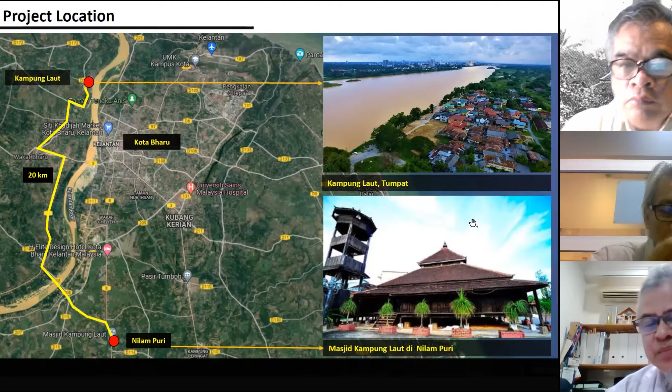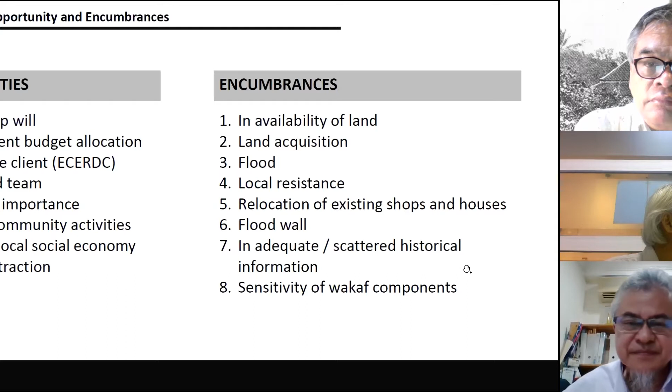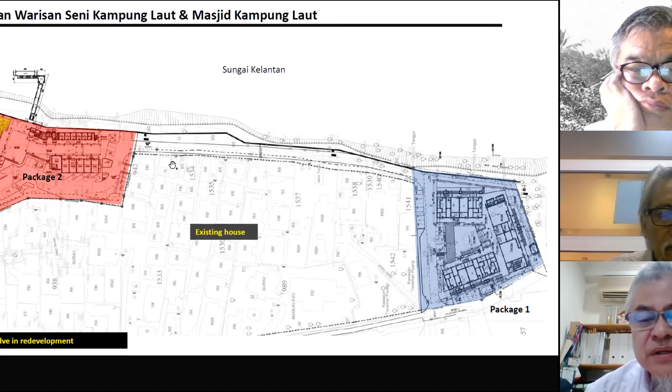Another site plan, much clearer, of package 2. On top is the platform that will house the Masjid Kampung Laut, and on the right side is the jetty. Interestingly, the flood wall has blocked the view of this package 2 site, but we requested and completed a flood gate, so people can access the jetty from the platform at street level, without having to climb over the wall.

We are also preserving two mature rainforest trees, which will blend nicely with the relocated Masjid Kampung Laut. Supporting the masjid is some commercial activity, a workshop, and a small shop selling delicacies. On the right side, we have listed some of the units that will be built together along with the Masjid Kampung Laut.

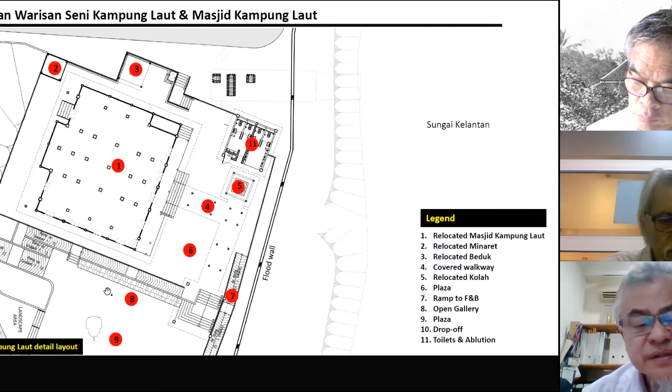We are bringing the original design we saw in Nilam Puri and putting it in place on this platform, just as it was in Nilam Puri. In terms of height from street level, it's actually 3.5 meters. So it looks like the original, but gives a good, prominent level from the street. I'll show you the perspective later. From this platform, visitors can get a good view of the river, as well as the other side of Bandar Kota Bharu.

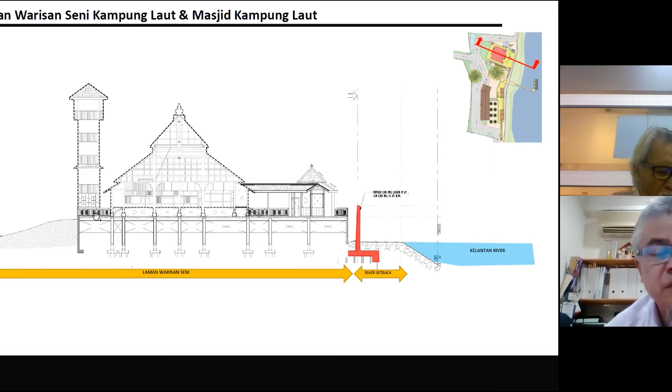See, this is a view from the river. This is actually the east view from the jetty looking towards Masjid Kampung Laut.

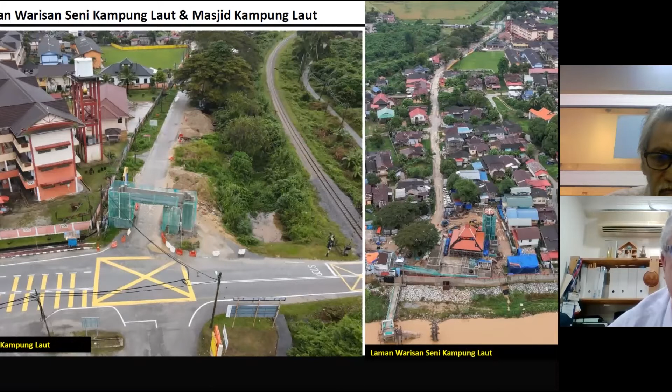On top of that, we also have a design gateway to welcome visitors to the overall Masjid Kampung Laut village and towards the mosque. On the right side is actually the view of the site mosque.

Looking at this, this is actually the main access. So from this main access, you can have a good glimpse towards the mosque at a prominent height.

Another view of package 2. On the left side is actually the mosque under construction, and on top of it is the jetty. Currently it's on a high side, high water table. The river is rising, but all levels are actually safe from flood.

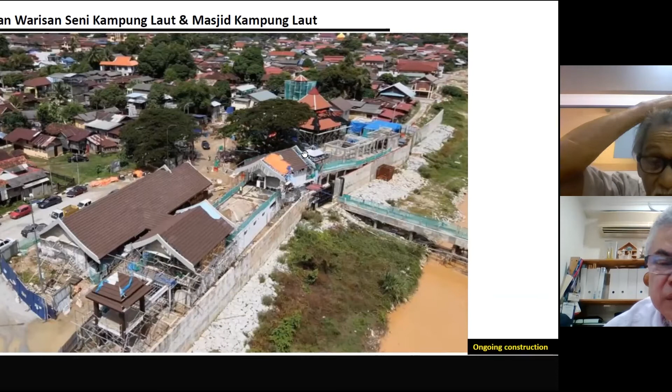Another view from the south of the site. I just want to show there's a floodgate so that people can access the complex and mosque at street level. They don't have to climb over the flood wall.

Another view from the east, looking from the jetty towards the mosque. Another view from the south of the site. I'd like to highlight that we are preserving two rainforest trees, which will blend nicely with the mosque.

View from the north. Okay, that's about it. So the overall complex is under construction and will be completed, inshallah, by mid-March next year.

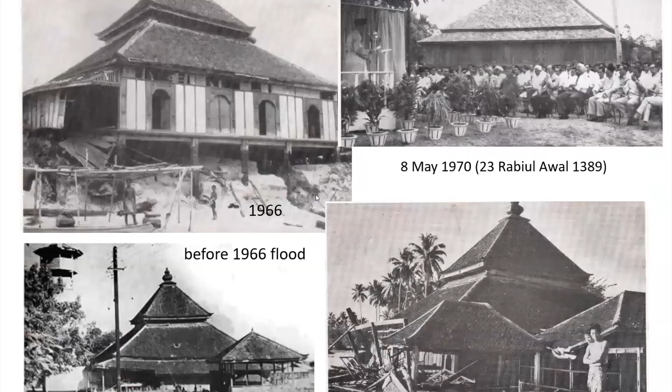A very quick step back into the history. The mosque in its original site was almost destroyed in 1966 and pulled into the river because of the flood. The picture speaks for itself - top right is the ceremony of handing over the mosque when it was relocated to the Nilampuri side. On the lower left, on the original site, you can see a lot of burial grounds and cemetery around the mosque, and on the right is the remnants of the mosque after the big flood of 1966.

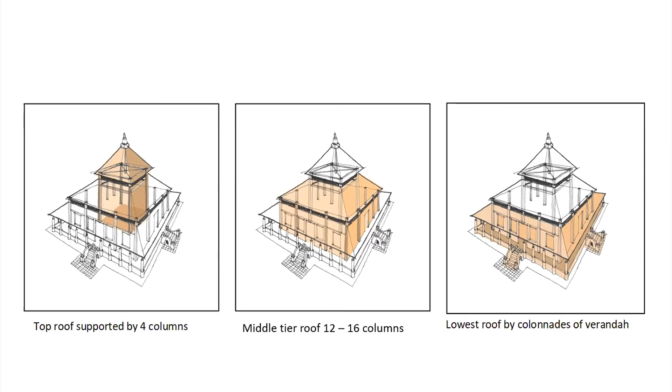Initially only the main prayer hall was relocated to the Nilampuri side, and then in 1988 efforts were made to add a few more spaces around it. For the relocation process, we only took the main prayer hall because of the limited space in Kampung Laut, leaving behind these other spaces. But we have kept them good, and in case the management decides to use them for some other function before a new mosque is perhaps built on the Nilampuri side.

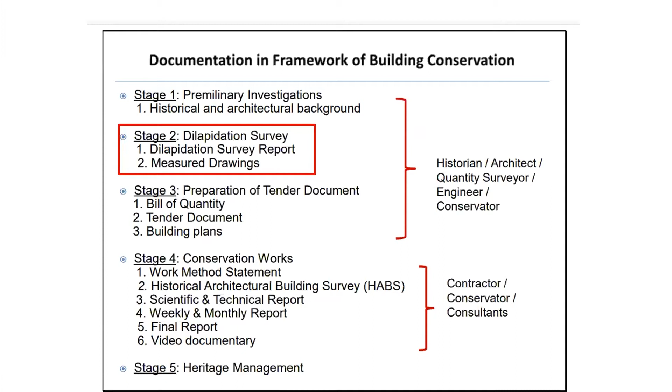This is also mentioned in the Jabatan Warisan guideline on heritage building conservation. It states clearly the process of documentation. I'm referring mainly to number 2, colored red or pink, which is about the dilapidation survey report—a detailed study and survey of the building to understand the defects, the decaying process, and the general condition. This is properly documented with photographs and drawings, and becomes part of the contract document and the BQ process. This report must also be submitted to Jabatan Warisan Negara.

What is a dilapidation survey report? It's straightforward—a survey to identify building defects and general condition, using video and digital documentation. It must be detailed and complete so it can give direction on how conservation or restoration work can be done, and serve as reference for future maintenance programs, students, and researchers. This report contains information on the condition and status of the building, and is usually done by a conservator, who identifies the source of defects and provides indications on how repair work and treatment should be carried out.

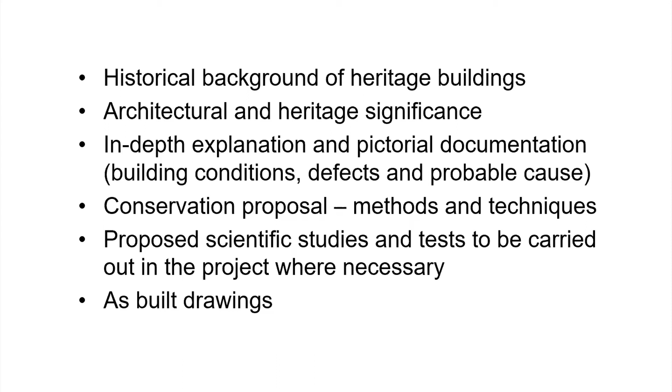We also have to do the measured drawing, because from this drawing it will indicate the location of the defects and so on. That will lead to a better BQ.

This is the dilapidation survey report of the Masjid. We did this quite a long time ago, about 2 or 3 years ago, before we were finally able to submit to the Jabatan, and now it's in the process of relocation by the contractor.

Just a little bit on the introduction to the building. These are all basically the components and building structures of the main prayer hall.

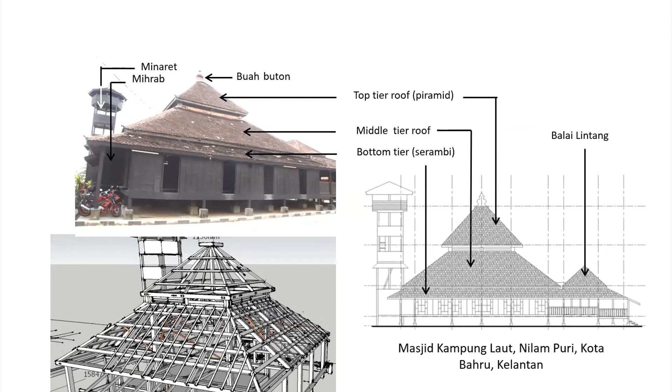Okay, sorry to interrupt, Prof. So you have 5 minutes, huh? Okay, okay, we rush.

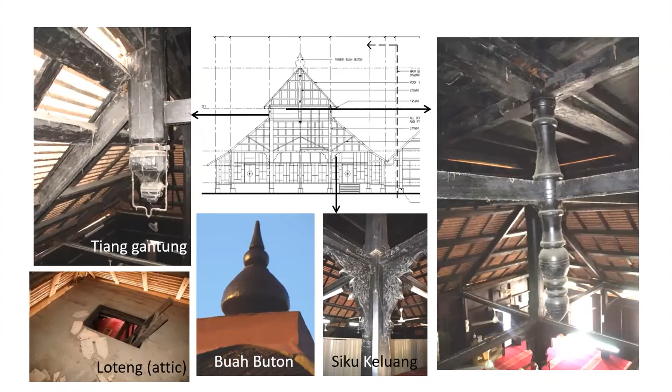These are more on the interior and the detail of the siku keluang.

And the view of inside the attic, this is what people call the suluk space. Suluk space is a spiritual space where you'll be on your own, doing your wirid and so on. Most of the ulama in the old days, this is the place they go.

Tiang gantung, quite a detail of it.

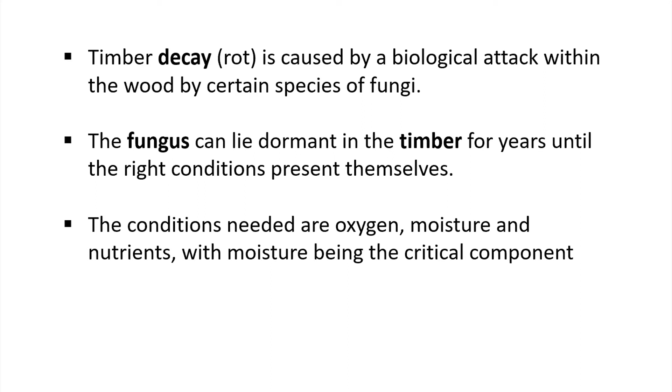And these are all again about the way deterioration happens in timber. Water is the number one enemy of timber actually, so from that water, other components will start to come in, microorganisms, fungus, all will come in.

Some of the rot is not visible from the outside, so we have to do quite a thorough study, not only visual inspection, but also other protocols.

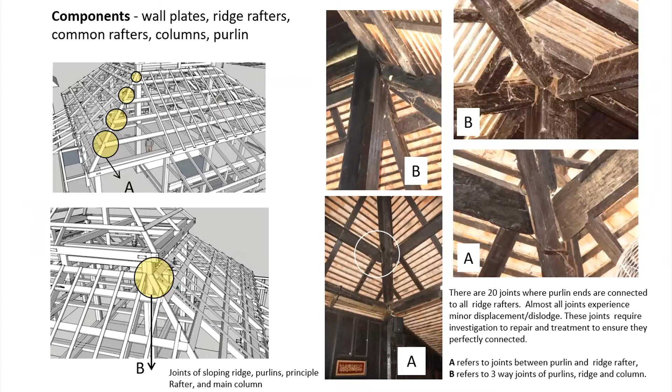This is very much the common defect, very much on the end rot, dislodging, dislocation of some of the joints and so on. These are all quite familiar in this mosque.

And also the roof tiles, slipping of Singora tiles and so on, because of the flashing has been damaged.

Again, the internal rot on the surface of the timber, because at one time there was a roof leaking problem, and that could be an indication of why such rot may be quite serious on the apex of the pyramid roof.

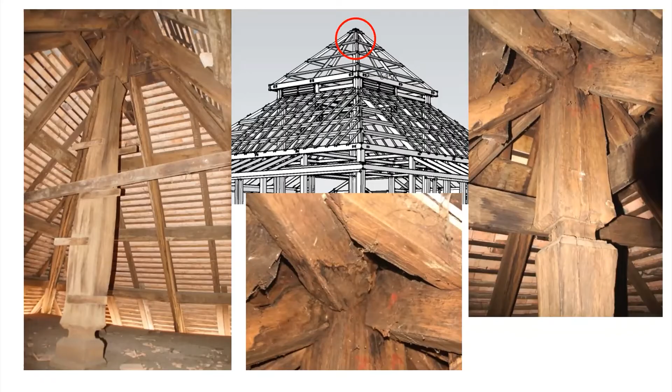Another rot will be on the base of the column. Most of the columns experience this quite serious core rot.

So in this lab report, you may note the grid number, and then you can mark it as a red circle there, and place some photographs so that you know the actual condition of each column.

This is a good drawing. Sometimes you may need additional 3D drawings to make clear the layout of the columns and so on.

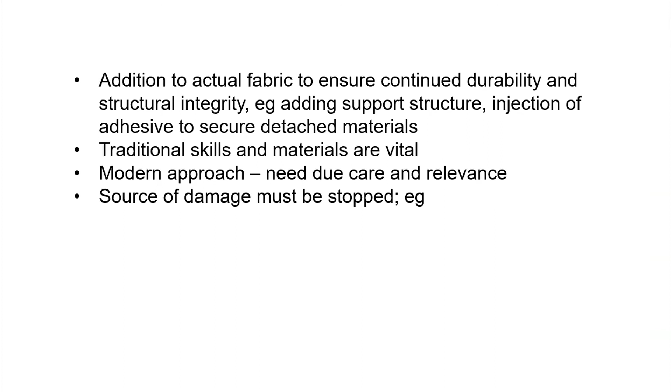Consolidation is an addition to a structure without much disturbance to the original structure. Some of the spans are too long. I found that some of the timber components have very long spans, and we are mostly going to use slightly heavier Singora tiles, factory guaranteed, so much heavier.

So one of the ways to provide additional strength is by having this consolidation work that you may propose in this lab report.

This one is about inspection to the wood. That means we are not only relying on the visual survey, but we have to use other modern techniques that allow you to understand the internal rot, and then you can detect early processes of rot.

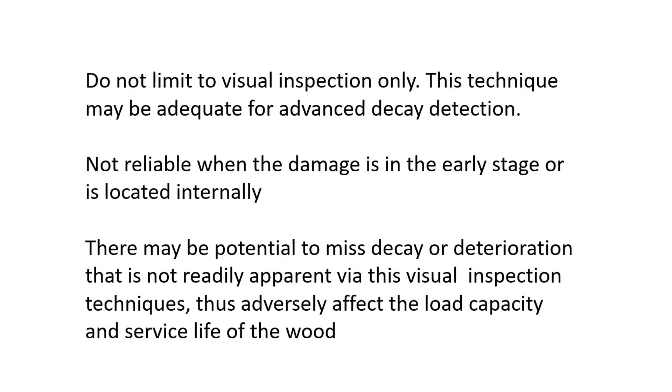About inspection again, if in those inspections you see something unusual, then further detailed investigation has got to be done.

Preservative - you have to use preservative, you have to use fungicide in order to treat the wood and sustain the strength, and also stop future attack by microorganisms or termites or any other wood boring insects.

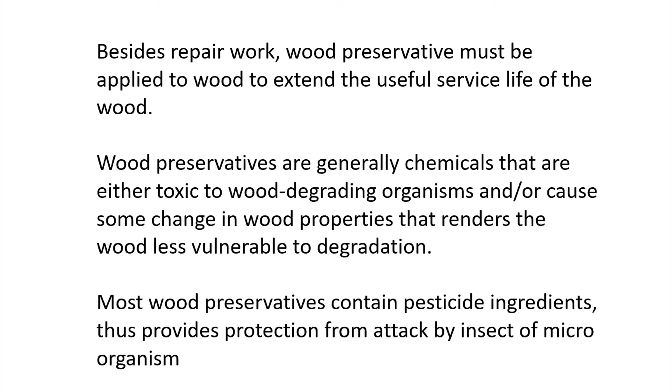Treatment of the wood - there are so many treatments on the wood that you can do after the removal.

Other items to be relocated, just for our information, the bedok, the mimbar, and also the kolah will be brought back. This is the way forward.

We are in the process. Hopefully, once we register this building as a national heritage, then we move forward to nominate to UNESCO and so on. It's a long way, but hopefully this is what we're going to achieve in the future, inshallah.

Final words - just a tribute to those para ulama who built these stones. They've done so much work that we're able to see this mosque and pass it to us. And we are here to pass it to our next generation. I like the phrase that says what we have here today is what we borrow from our children.

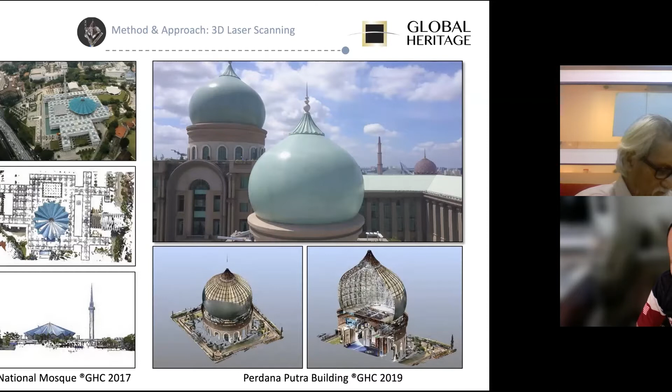This is some of the projects that have been done, in which we managed to convince Black Fox Engineering, showing that we've done the National Mosque, and also the Perdana Putra building, known as the PMO building. We've done a lot of heritage building scanning before that, including the Sarawak Dome buildings. In 2019, we did the Kuching Islamic Museum, the Kuching Textile Museum, and also the Old Museum in Kuching.

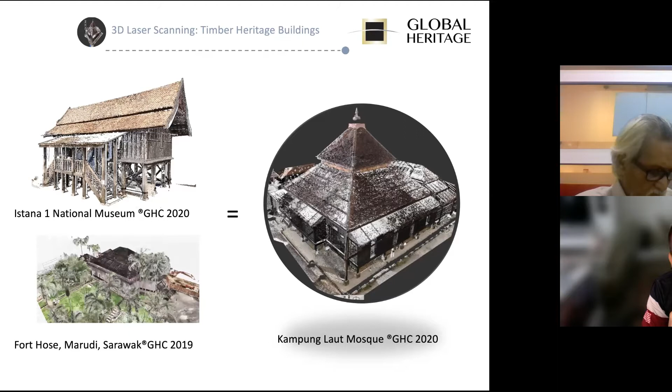A similar project where we applied this method is Istana 1 National Museum, which was our project in 2020. We also completed Fort Hose Marudi Sarawak, which is quite similar to the project we have at Kampung Laut. The difference is that the building was not dismantled, just refurbished, to repair its main structure.

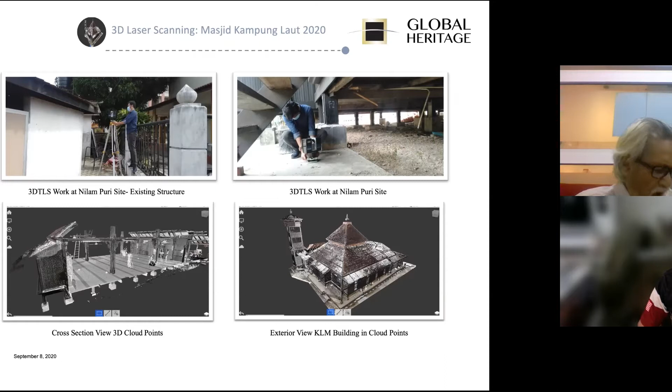Beginning with the scanning project, after we got consent from the main contractor, I mobilized our team to go to the site and scan it. I'm going to go fast here, just showing the beginning of the work and then the result. This is the result of the scanning method, from which we are able to simulate the whole process.

This is when we received the contract, which specified dismantling the building top to bottom - meaning from the roof, then the body, the mid central zone, and of course up to the stump.

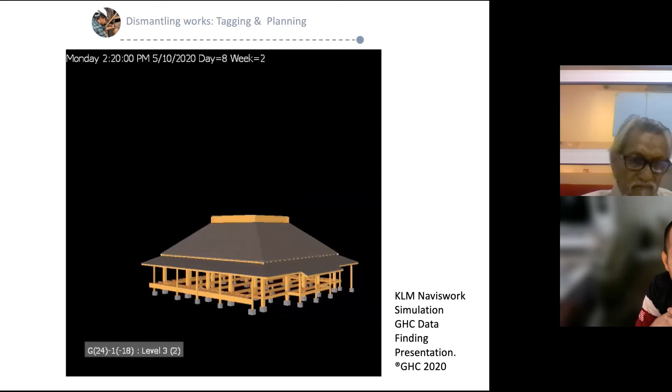But when we did our simulation in terms of the work program, it seemed like the top to bottom approach was not very suitable for the system, especially when dismantling - we needed to know where to put things and how to store them, and have a very systematic way of dismantling the whole project.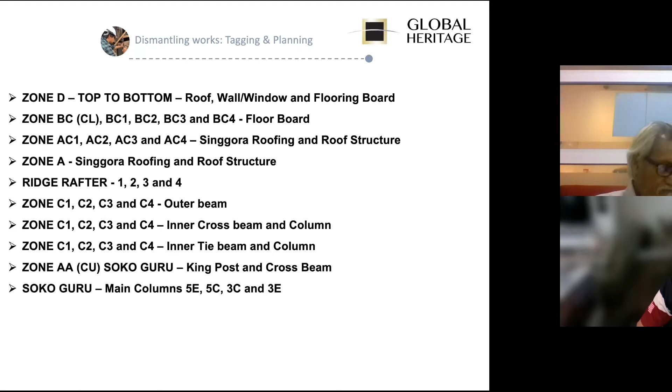Basically, what we do is zone the building, opening up the outer perimeter first. Then we open up the floor joist so we can release some of the tension of the structure. Later, in step 3, we introduce bracing to the building while doing the dismantling work.

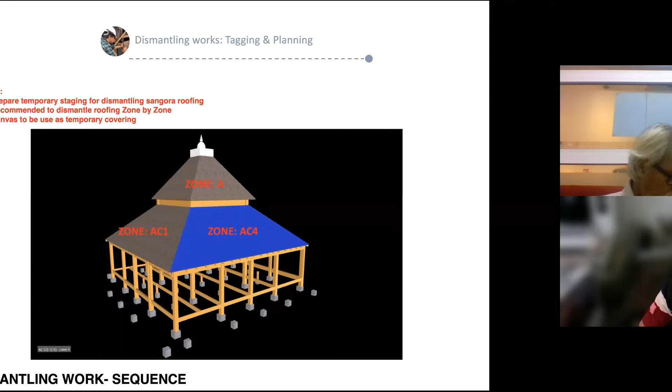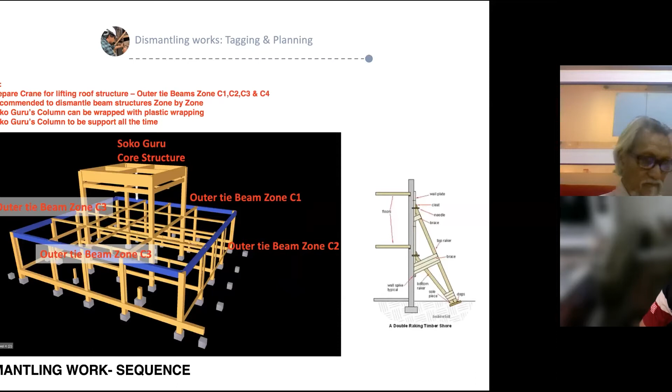This is just an example of the zoning given to the project team, so everybody is speaking the same language - it's easy to talk about zone A, zone B, zone C, zone D, so people involved in the dismantling understand our requirements and how we're going to do this. Later we zone it and dismantle it part by part until we're left with the main structure of the Soko Guru and the main structure of the building. This is later going to be the first thing we actually install, because the system is an interlocked system.

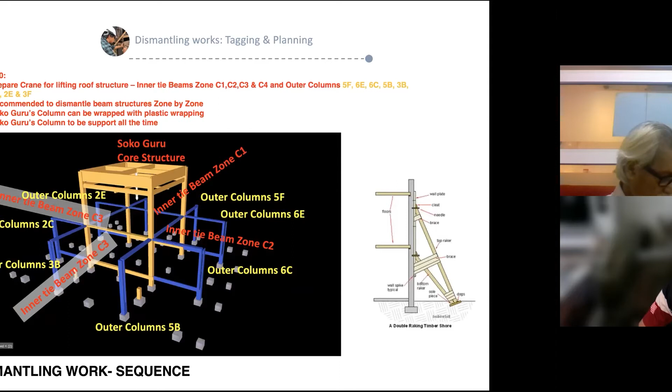So we need to be very careful not to force any of the dismantling work, but we also need to understand how this interlocking structure is actually built, so later on we can dismantle it according to the sequence. This is just showing some of the method, and then later on we're left with the Soko Guru itself.

This Soko Guru is actually very critical, where we need to remeasure everything before we dismantle it. We also need to finish the tagging in order to guide us when we want to install it back, so it's in the right sequence. This is just a diagram showing how the tagging system works.

So we have Zone D. Zone D is actually the additional part that was added in the building - it's actually quite new. And then we have the main zone, the central, and then the roof.

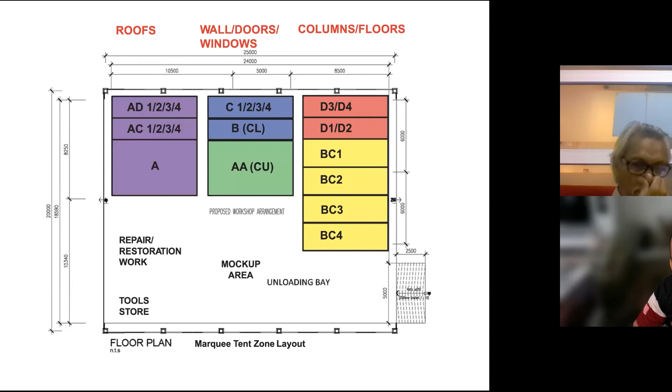So these components are laid out in a marquee tent for storage purposes before we move the whole component to Kampung Laut. The color coding you see here: the purple one is for the roof, and AA is for the Soko Guru. The blue one is for the central component, including the floor, and the yellow is the floor joist. Zone D is actually the last component of the building to be installed on site later on.

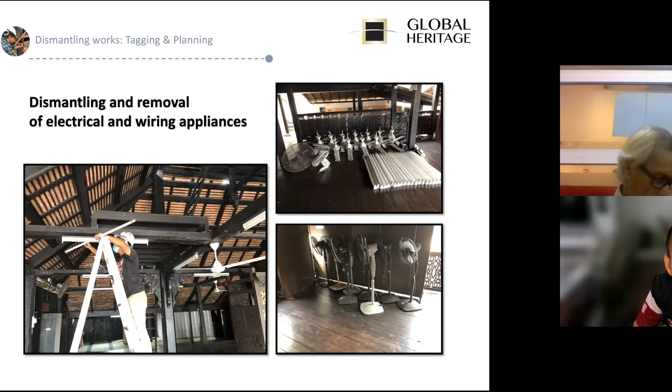So then we start with the dismantling process. I'm going to go very fast on this - I think the pictures explain it all. The most important part is actually to start tagging all the components.

So this is where the tagging component started. We have to refer to the tender drawings because the tender drawing is not specific to the component, so we need to make a note on the tender document saying that all these components are going to be recorded, and then the coding system is going to be used in our installation work later on. This is an example of the tagging that we did.

These are all the non-structural elements for the building, so these are the things we dismantle first. Later on, we recorded what things have already been dismantled. This is a sample of our weekly reporting on what things have already been achieved on site, and what things we want to achieve.

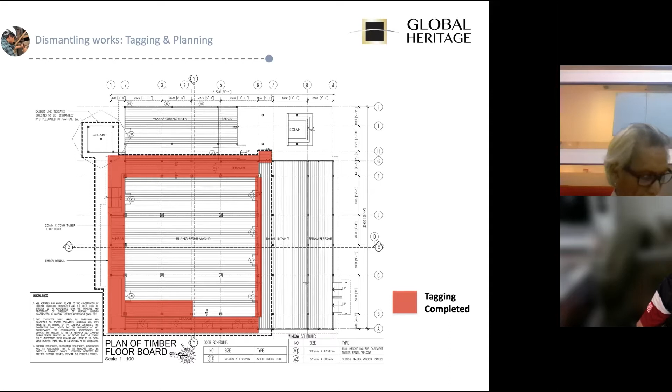Later on, we need to do a mock-up before the actual dismantling is done. In this case, the first mock-up is at Zone D - this is actually the least risk component that can be used as a mock-up for the system we are introducing. So after finishing the mock-up work, we need to start to actually dismantle the whole thing.

So just to show what I meant by Zone D being quite new - you can see the difference between the old timber and the new timber that was later added. Much of the new timber is all straight-edged and very nicely cut.

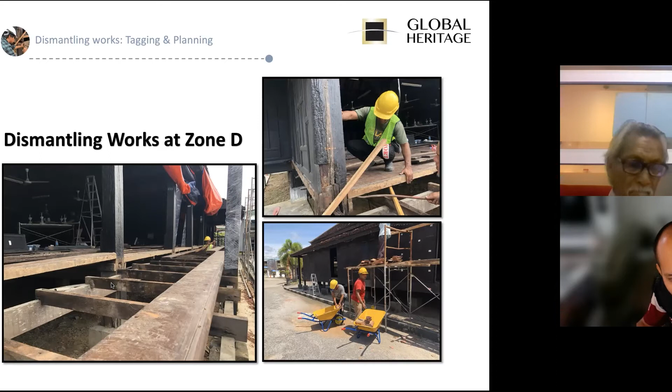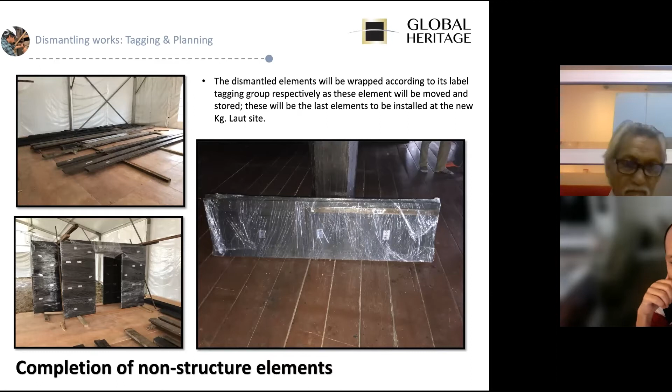So again, we have to report on the work by looking at what has been dismantled. This is just showing the complete work done for the non-structural elements, and we have to store it in the marquee tent. This is the last component we're going to reinstate when we reconstruct the building.

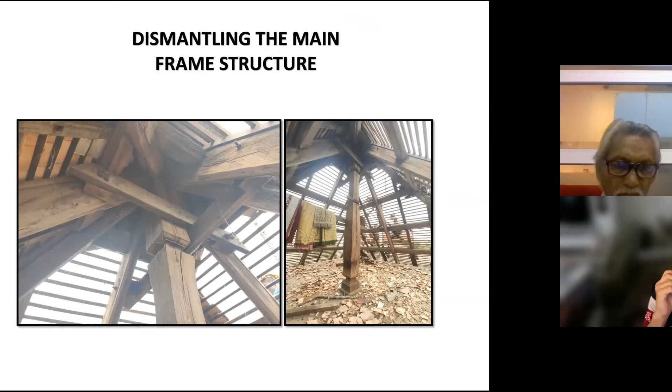This is very critical because all the processes—tagging, storing, stacking, moving, sorting, and documenting all the parts and pieces of the building—have to be synchronized so that everybody understands their role at this stage.

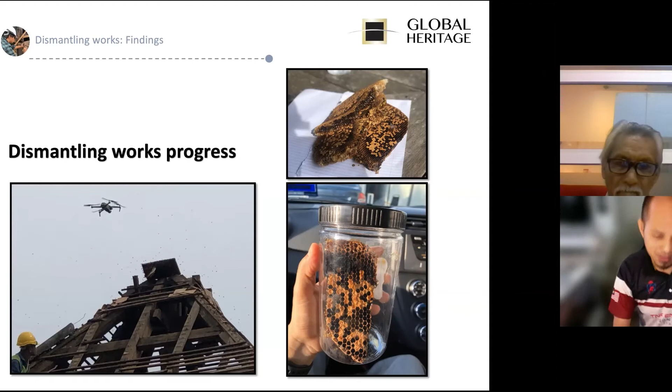So this is some souvenir that we brought back. There were bee colonies there. Okay, I already have 15 minutes, so I'm going to be very fast on this one. Basically these are the souvenirs.

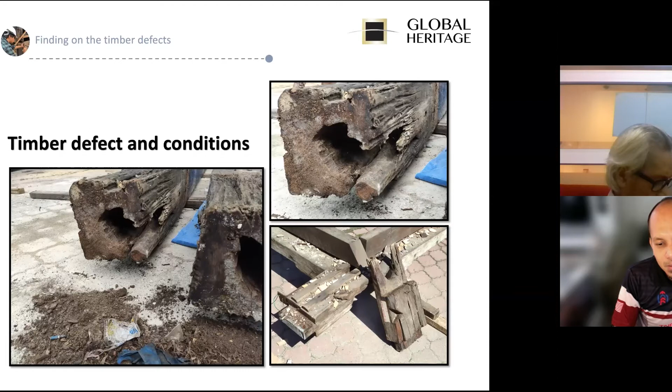Then we continue the tagging work on the ground after all the building components have been dismantled. I'm going to go fast—these are some examples of the defect timbers once dismantled.

So we have all the documentation. Every inch of the work has been documented on paper so we can submit it for assessment from the consultant, and also from the client.

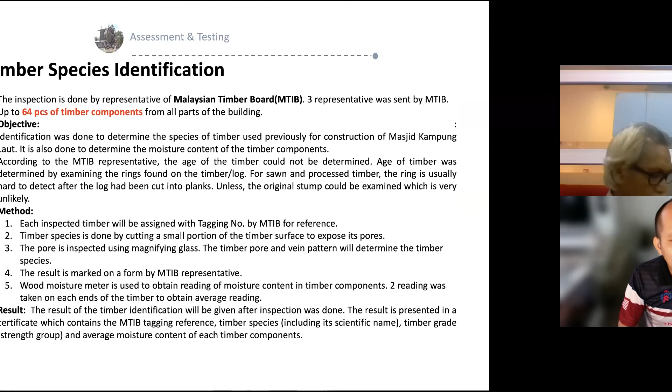We have a lab timber tester from the Malaysian Timber Board. So 64 pieces of timber components, all of the building components, we tested.

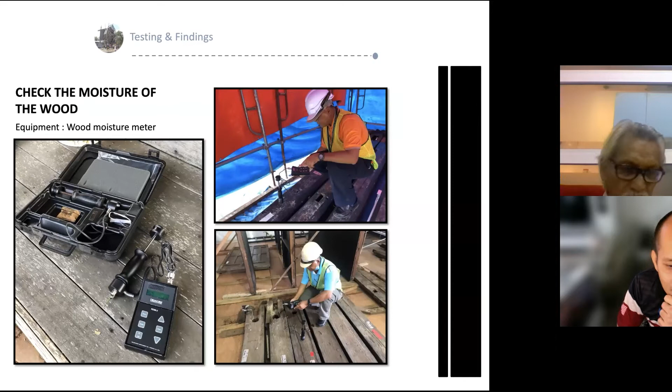This is actually a damp test to identify the water content inside the timber. This is very important.

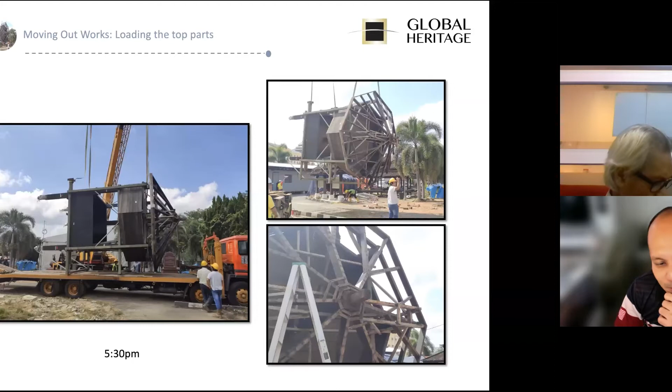Then this is the loading part. We start at basically 3 p.m. to secure the whole thing, and at 5:30 p.m. we load the minaret. Then this is the process of moving it, and all the challenges and obstacles we had to go through.

The first minaret bottom actually arrived on site at 5:30 a.m., and the top one at 7:30 a.m.—basically 2 hours later they arrived on site. So this is the first installation begin.

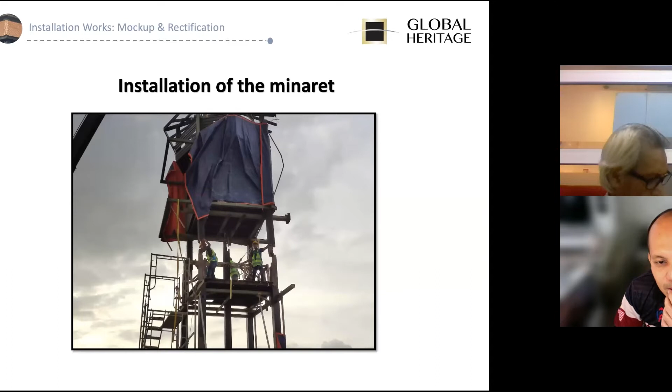This is some of the HABS drawings I completed. Then we start with the mock-up of the whole thing, because at the end of the day, with all the tender drawings, the 3D laser scanning, and all that information, it's just for us to realize that we need to do a proper mock-up of the building to set it up carefully.

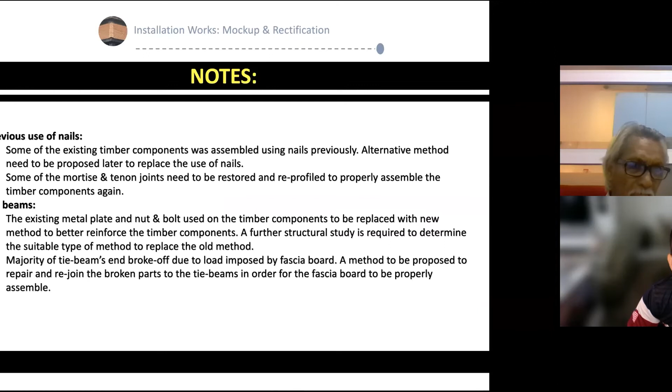So this is just the process, looking at some examples of issues. We document our suggestions on what actually happened to the first installation or removal of the building, and what damage has been done to the building.

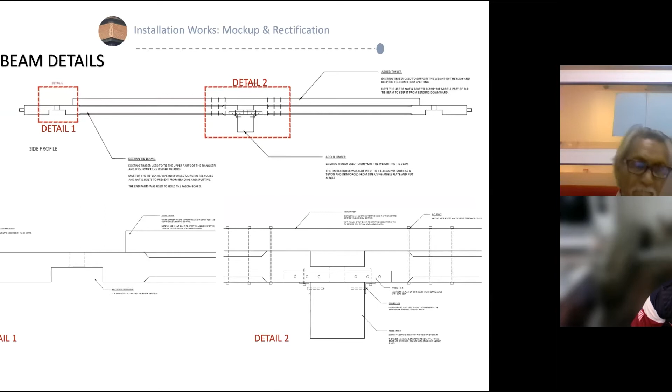So we do the assessment, and we also present all this assessment to Prof. Amran, and then come up with our own suggestion and solution.

So we're also referring to the tender drawings, and come out with our markup on what things we're looking at, and how we can suggest the repair work. This is later a detailed assessment of the building after the mock-up work.

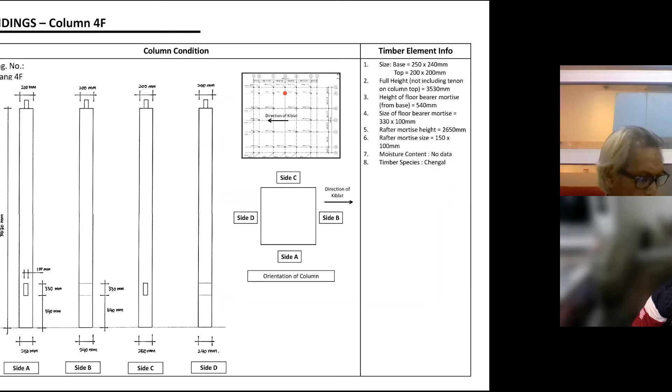We have two sets of mock-up work. The first mock-up is the Soko Guru, done on site near the Nilampuri workshop. The second one is after the building, after all components have been moved into the site.

So these are some examples of notes taken on site to be assessed together with the consultant. Every one of these components is documented similarly, and also presented to the consultant in a similar way.

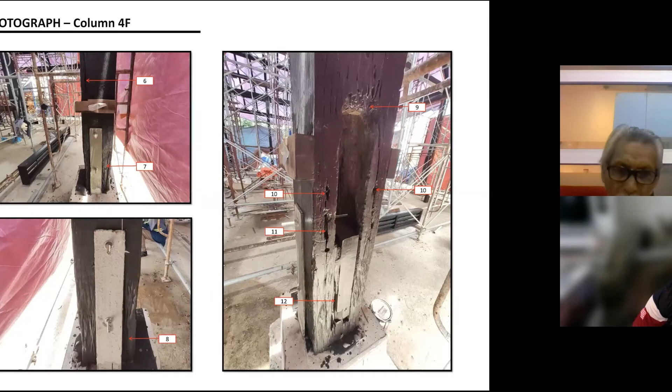Right, so these are all the issues been highlighted, and then we come up with a work method statement to actually resolve all this problem. So sometimes it's going to take months also to come up with consensus on the rectification work.

All right, so these are all the examples. These are just a sample of a data finding report on the buah buton. So we have to record all the finding. This is actually the actual buah buton that's been replaced by the fiberglass buah buton.

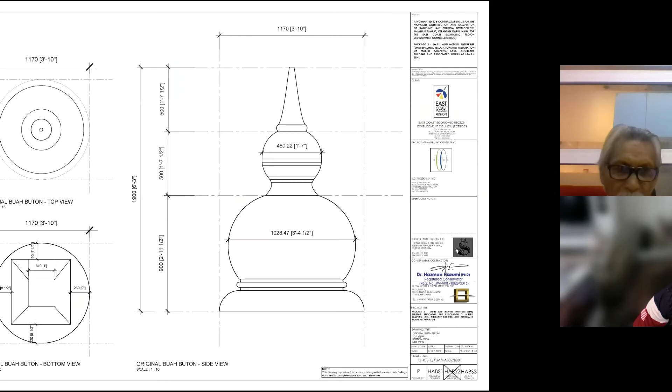Right, so these are all sample of the drawings. I think I'm almost finished. Basically once it was agreed on the repair work, we have our civil engineer to endorse the drawings, and then also our work, then it passed to the actual work on site. Right, so this is actually the actual work on site.

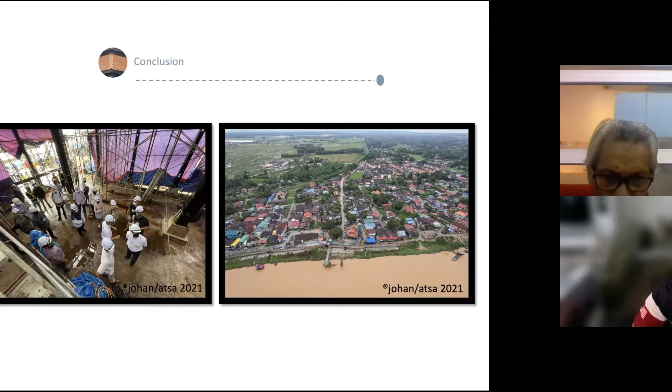So my conclusion is actually the project has been completed about 75%, probably 80%. So another 20%, hopefully that we can actually achieve the deadline on March 2022 for the completion of the project. So that's me, and then now is continue to actually share all the experience that we have.

So we have Encik Johan there, right? Johan is actually the one who provided us with these pictures. So I think that's about it from me. I'll pass it to the moderator.

All right, so I think another one which Dr. Hazman has mentioned about the defects of the timber, the assessment, the test, and also the mock-ups and also solution of the detail that we have worked out for that as well.

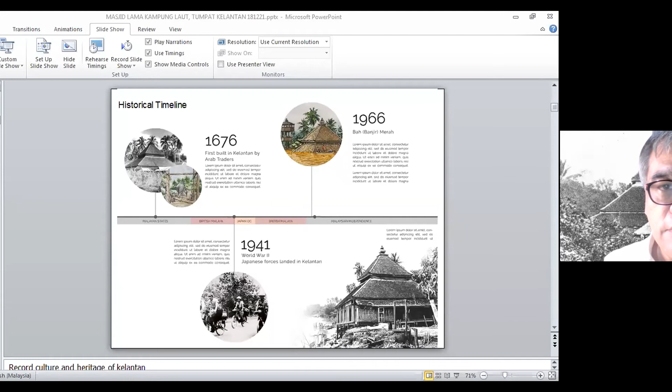Sorry, Architect Azim, can I interrupt a bit? Maybe you can start sharing from the beginning, from your slides. We are not seeing that. Okay, I actually have already shared, let me share again. Can you see the slide? Not yet. Can you see it now? Maybe you put it to the first page and start from the first page. Just page up. Sorry about that. Is it seen, the slides? No, not yet. Maybe just share the slides and then put it back to page one using the cursor, scroll back to page 1. Are you seeing the slide now? Yes, this is the first slide. Thank you. I just quickly go back to what I said just now.

The project is sponsored by ECERDC, the Eastern Corridor, which covers the area of Pahang, Terengganu, Kelantan, and Northern Johor. So the coffee table book that we were doing is for the consumption of the public. It's not going to be a historical or scientific paper.

The name of the book is called Ibarat Sirih Pulang ke Gagang, or in English, Homecoming. As you know, Kampung Laut has a long life ever since it was established in the 1600s, and has been moved and enlarged, and now it's coming back. It's probably one of the few mosques that's been moved twice. What is important, other than the dilapidation studies and the conservation method, is to tell the story behind it and document the culture and how it came about.

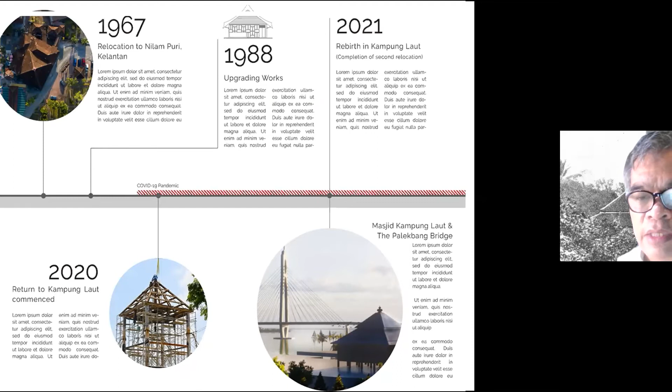Hamdan Tahir, who later became governor of Penang, helped save the mosque. So in 1967 it moved, in 1988 it was upgraded, and in 2020 it was moved to this present site back to Kampung Laut, with subsequent upgrading works. The book is in progress because we have time to produce it since the work is still ongoing until March, and we have until probably mid next year to produce the book.

So it is writing in progress. Working with ECERDC is very meticulous, they want to see every little thing, and we have to work with several people to produce the books. We want to make sure that when the book comes out, it is pleasant to look at, nice to read, and for public consumption. On second thought, we might produce more of a historical book, because the first one was done by Kalam when it was moved from Kampung Laut to Nilam Puri in 1974.

It was moved in 1970, completed. And after the Banjir, like right now, the monsoon season in Kelantan, in 1966 and 67 is where the big flood happened. And if you remember correctly, in 2014 there was a big flood as well. They call it Bah Kuning.

So how we have to generate the book, we have to make sure that the book is produced with good quality pictures, high resolution pictures, taken almost every couple of days. And I'll show you the photographer by the name of Johan. He's very good at taking pictures. And we also rely on some pictures from the conservators, Dr. Hazman, and Pakatan Akitek, Akitek Shahar, and also Prof. Amran.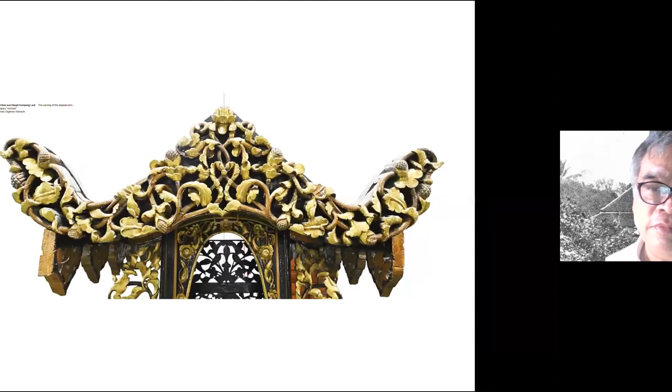So this is the front of the book that we use. And then Ganggang - Sirih pulang ke gagang. Sirih, as you know, is a creeper, and gagang is a tangkai. So we use this sort of sketch by Akitek Zulkaisar. We have to explain from the beginning what it means. That's the big tree, the rain tree, that Pakatan Akitek, Encik Suha, Architect Suha Sahar, was referring to.

So we are taking this, this was taken earlier on. We are taking shots here from time to time, as we are thinking of also producing a website to upload some of these pictures for sharing purposes, historical data. What I find in my past writings, and also in this book, is you have to go into several sources.

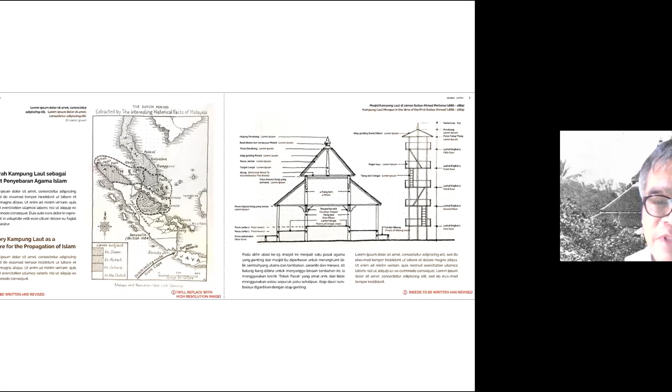Those days, before 1909, the Anglo-Siamese treaty, Kelantan and parts of Terengganu, Kedah and Perlis were part of Thailand. So in fact Peninsular Malaya, when you read it, actually includes Narathiwat, Songkhla, Patani, Yala, and Satun. In those days, historically, the Thais were very strong. They attacked Malaya, or the southern part of Malaya, every summer or whenever there was a season to attack. In fact they once attacked all the way to Singapore, conquering until Singapore, when it was called Temasek.

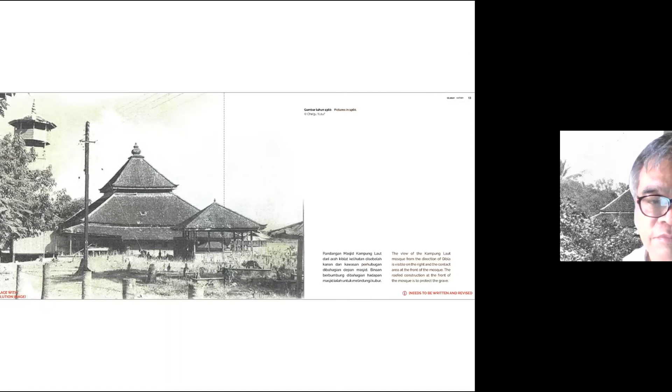So this is some old pictures that we have dug up. There's a lot of work in terms of researching, and we had to do some research through some locals, the museum, and Johan as well, who is an avid photographer and historian. Some of these pictures are rare pictures. And there was one photographer in the 60s, now no longer around, who took some of these pictures with his camera - Cikgu Su, I think his name was.

So by now we have drone technology. Having drone technology is also good because you can see Kampung Laut as it is now and record it, because previously there were many books, many papers written about Kampung Laut and the Masjid Kampung Laut, and all of this more on the writing side, so we don't have much in pictures. So this is something that I think will be useful probably from now into the next 50 years. As you know, the Masjid Kampung Laut was in Nilam Puri for 50 years, and it's moved back to Kampung Laut in 50 years.

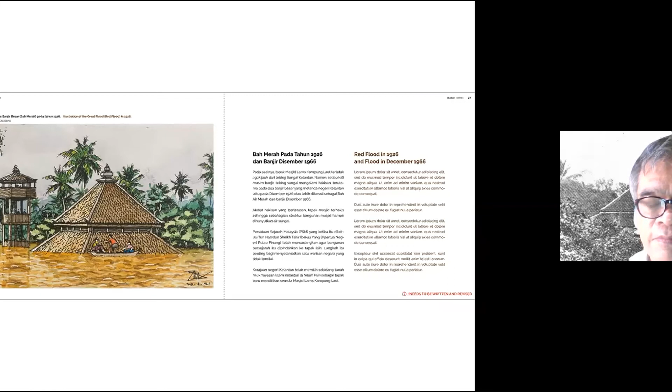You never know, due to climate change in the future, it might have to move again in another 50 years. This is where the red flood, well it's not exactly called red flood now - we found out it's called Bah Merah, Banjir Besar. It was up to the roof eaves, if the history is correct, and it caused extensive damage. Now the original location is at 64 feet in the middle of Sungai Kelantan.

We had divers go and check the remnants that were there, and they found them. So we exactly know where the position is and have the global positioning. This is how the original mosque at Kampung Laut looked and how it was first built. It had three or four stages of development until 1966.

Then the history behind the first move to Nilam Puri, when the big flood happened and the mosque was closed, and they did not know what to do with it. Time was against them, so some parts of the mosque had to be relocated to save it. At that time it was highlighted by two people, Hamdan Tahir and Mubin Sheppard, who worked closely together collecting money and volunteering to move it to Nilam Puri for safekeeping, while figuring out what to do with it eventually.

It has now moved back to Kampung Laut. There was actually the intention to do that.

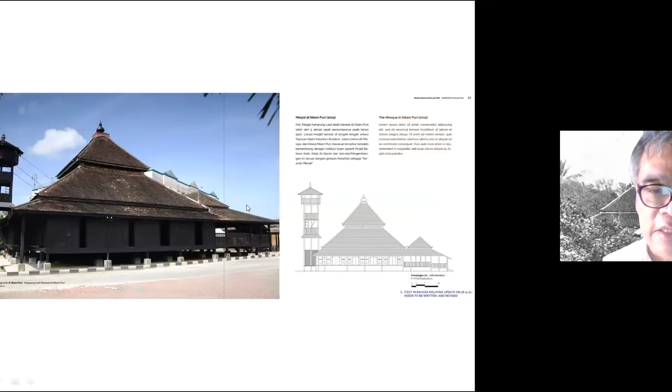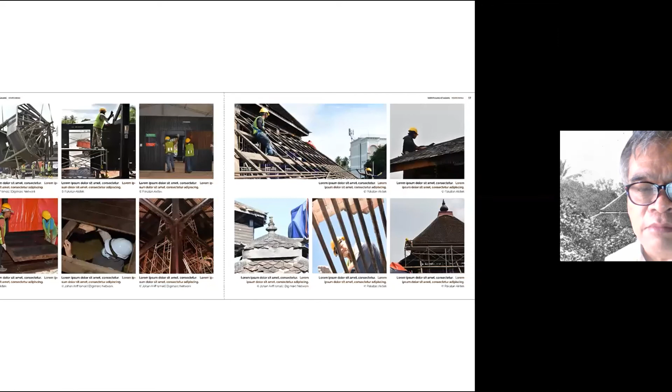So this is an earlier shot, and this is the final shot before the mosque was moved, and then this is when it was moved to Nilam Puri and the start. So we had to document the process for future reference and how it was built.

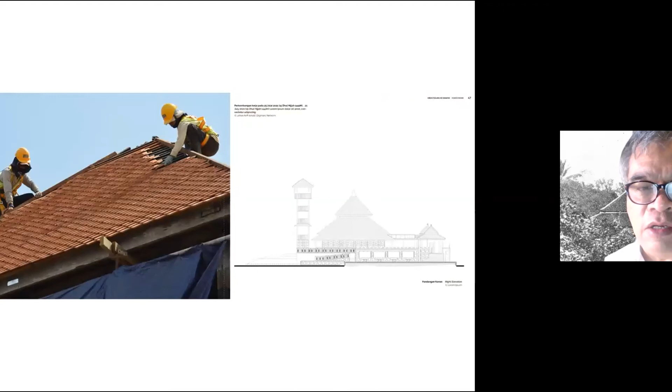This is the first complete structure that was put together, and all these are pictures selected from among hundreds that were taken. We use those pictures so they become historical documentation for future referencing.

Then back to its original place. So this is going to be replaced by better shots in the future when it's completed in March. In March and May we have the window to take pictures. This is the soul of Kampung Laut, and all this will be added to the book to show how colorful Kampung Laut is.

Under references is the recording and telling the story of where the ornaments or decorative items came from. Many came from vegetal motifs, from flowers, and the decoration has meaning at the rafters and the roof joists.

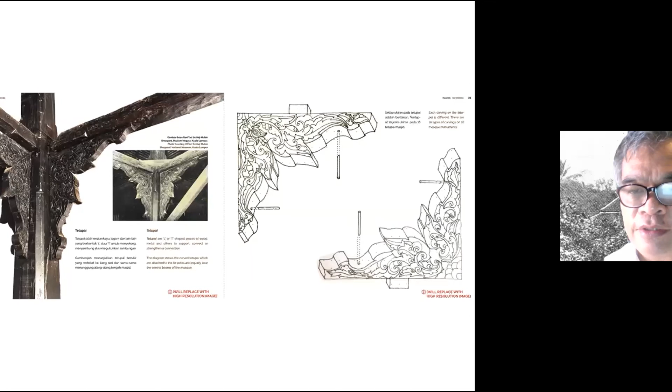Some of the detailing as well we are including in the book. And towards the end now is a back page, and it's also taken the back of the mahkota, or the crown, which just now you saw is gold - but it's not gold throughout, it's gold leaf. At the back is timber.

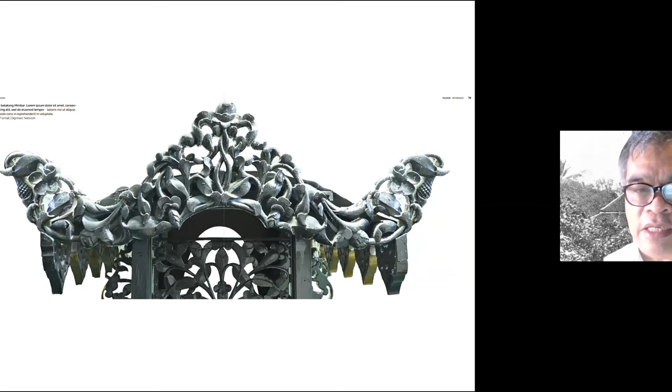And some of the pictures we've taken recently, about 3 weeks ago, and the people involved - Architect Zul, my partner, does a lot of all the drawings, the freehand drawings. And Khoo Salma, I think all of you have known, a very active activist as well as a writer from Areca Books, going to be published under Areca Books and also ATSA publication. And also Johan Arif, who is a very good historian and also photographer. Without them, many of these items would not be carried out.